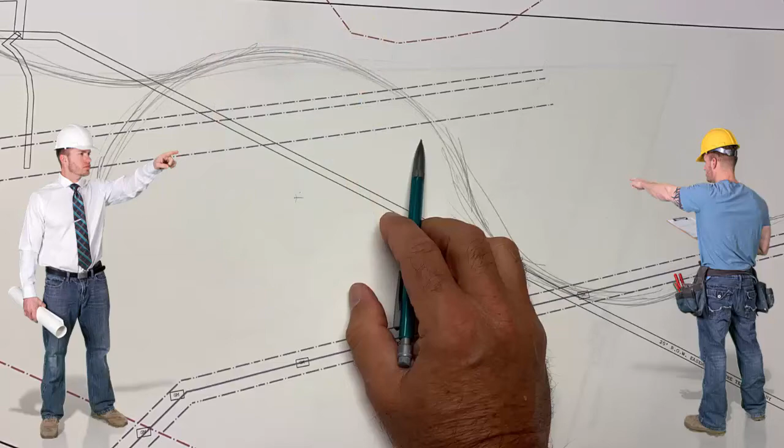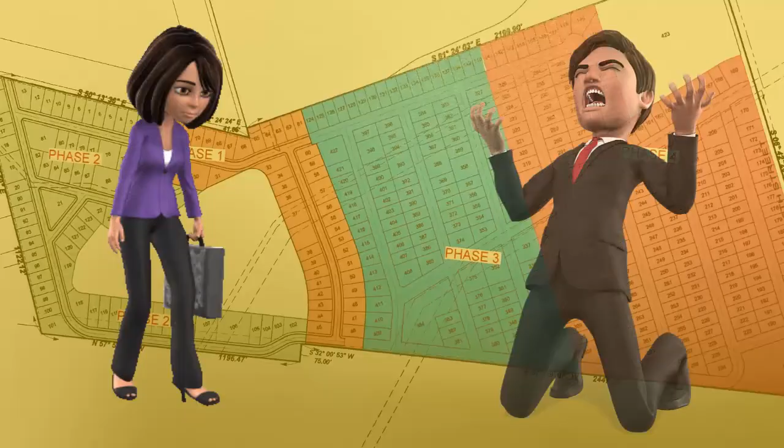Land surveyors and civil engineers demand precision, or they could end up in court defending their work. The land planner, city planner, or architect designing rough concepts, hand-drawn or in AutoCAD without regard to real-world precision, requires the land surveyor or engineer to fix everything. They often trash the original sketch ideas and replace it with a cookie-cutter design. This creates animosity between the artistic consultants, who often do not understand the high cost of construction,

and the precision consultants, who lack the knowledge required to design an exciting neighborhood with market advantages. The land developer will run their financial estimates on the initial concept. This ends up with completely different financials after the engineers get done with their process to final design, often depleting profitability.

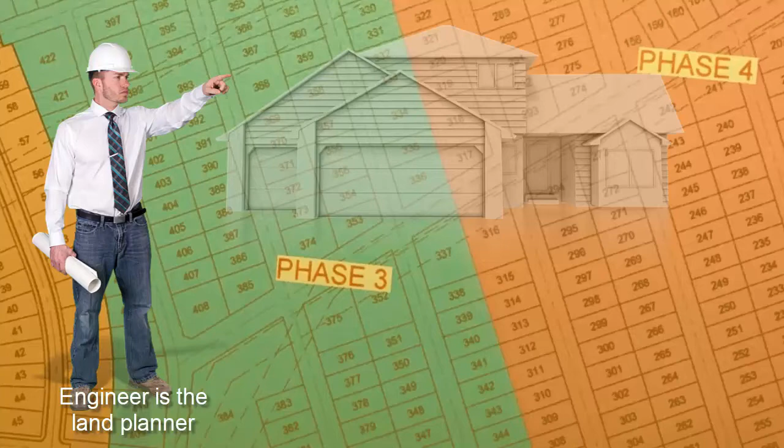The civil engineer acting as a land planner does so with little regard to aesthetics or market advantage for the client, unlikely to pay attention to the architectural elevations or floor plans to showcase the homes or maximize livability. They instead concentrate on the numeric values to make sure the project meets the minimum standards. This situation is typical of the local engineer acting as planner for all their various developer clients. The artistic consultant abhors the results, but most feel powerless. The consumer is the ultimate victim.

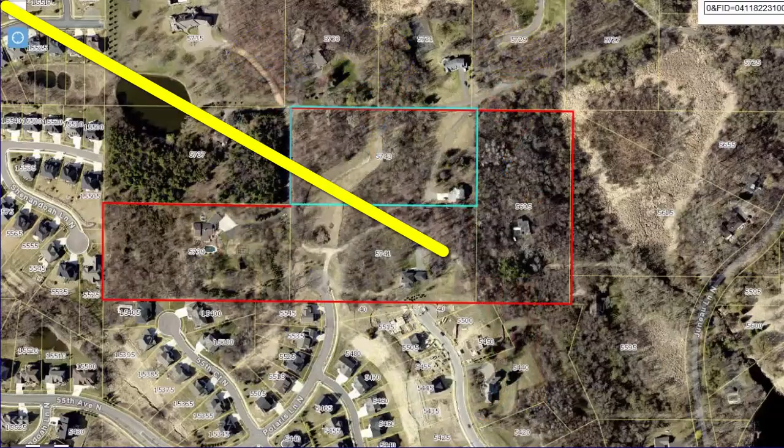Online mapping data is terribly inaccurate. Yet most people, including planners, architects, and engineers, think this free information on the internet must be precision. Well, it's not. In this recent site we planned in Texas, the GIS data from the city, the boundary conflicts

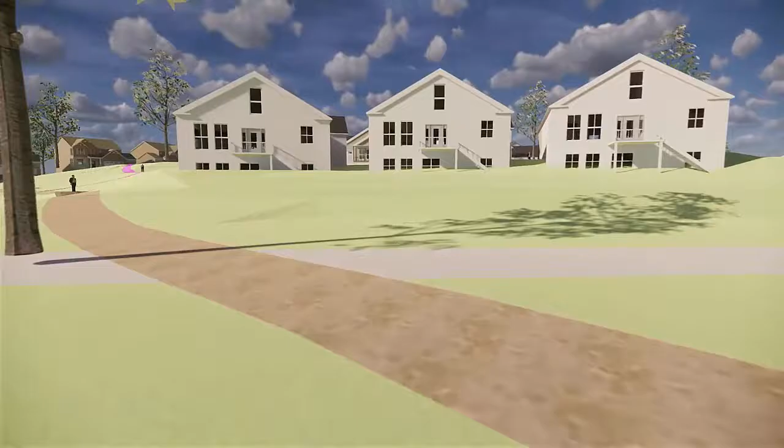with the aerial topography by over 400 feet and over 10 acres. In this recent Minnesota neighborhood we designed, the GIS boundary conflicted with the survey boundary by over 20 feet, requiring a complete redesign of everything. These are not rare instances, but what's rare is when online data is actually somewhat usable.

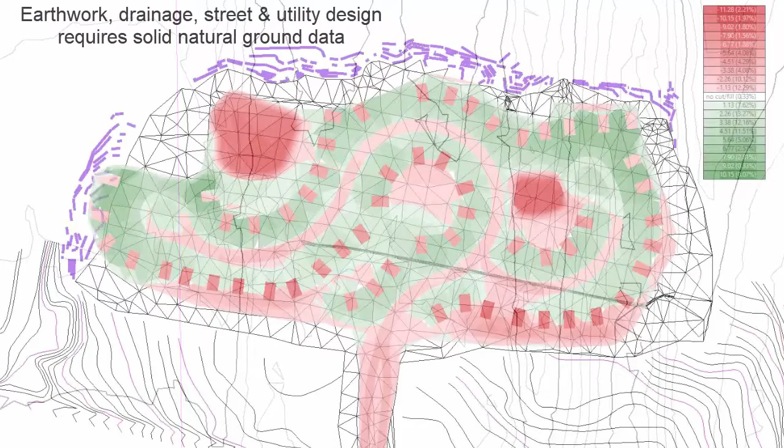The resulting topography is a spastic linework that forms incorrect surfaces, which can create street and utility design and earthwork errors. The survey crew in the field consumes man hours, no doubt, but the excessive data slows down the engineering process, defeating the promise that LiDAR actually saves time and money.

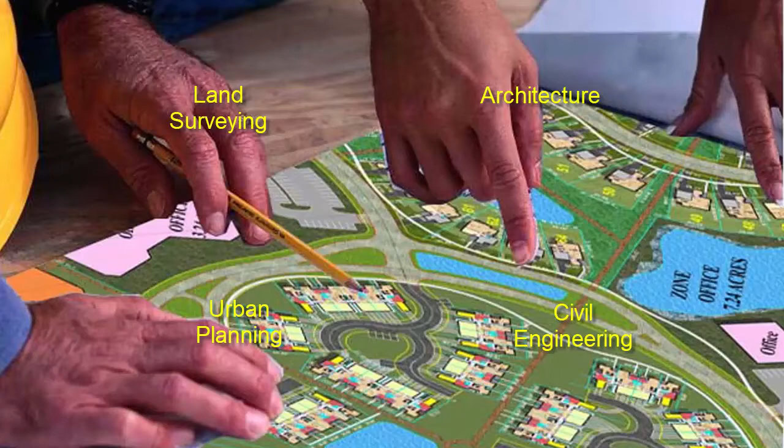Universities that teach architecture, urban planning, civil engineering, and other real estate-related courses should have common exercises, students working on the very same projects, but they don't. The students all learn a very narrow and targeted aspect of growth. They learn totally different software platforms and lack a common knowledge base.

Historically, 80% of the new growth in the United States has been suburban. Post-pandemic, it could be even greater. Most, if not all, urban planning courses do not teach any suburban design courses.

The regulations we have in place fail miserably because they are a paint-by-numbers approach to growth, a zoning classification with a list of minimums. City regulations should reward builders and developers who submit neighborhoods that exceed the minimums. Unfortunately, today's regulatory systems fail to do that.

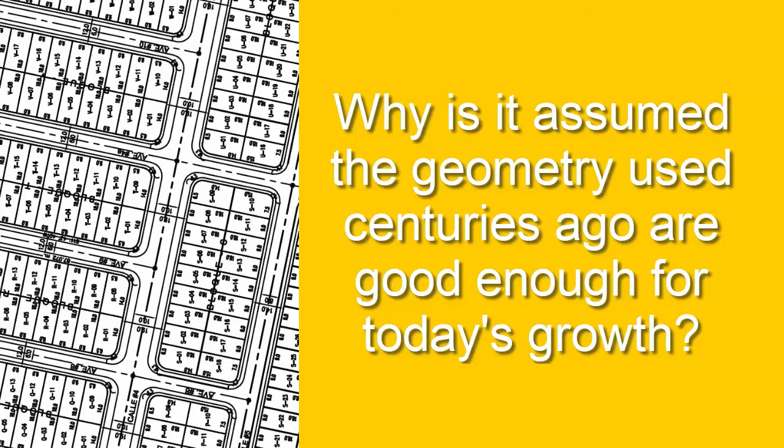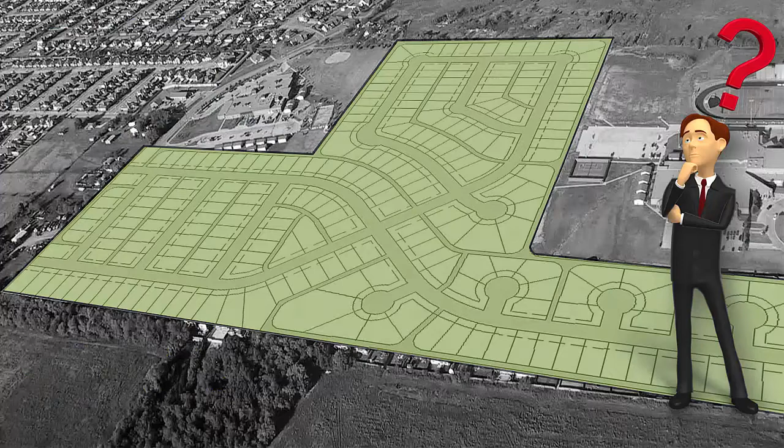The geometric pattern of growth has not changed since the days a wooden cart and donkey served as the family's transportation. The problem is made worse by developers who want to spend the least time and money to get a plan to submit, and far worse when software technology can produce that plan with hundreds of lots in just a minute or two.

Software developers have dumbed down design so that design no longer exists. Look at all the new apartment buildings sprouting in Minneapolis. All appear as if the exact same designer was used. In a way, yes, they all use the same Revit by Autodesk, using the same preset button to produce the same plan in a fraction of the time, yet bill the client the same fees for less.

This problem of over-automation, dumbing down design, has been prevalent in subdivision design for over three decades. Combined with clients demanding work be done yesterday, no wonder developers and builders with good intentions just replicate, and their desire for market advantage and high profits go down the drain.

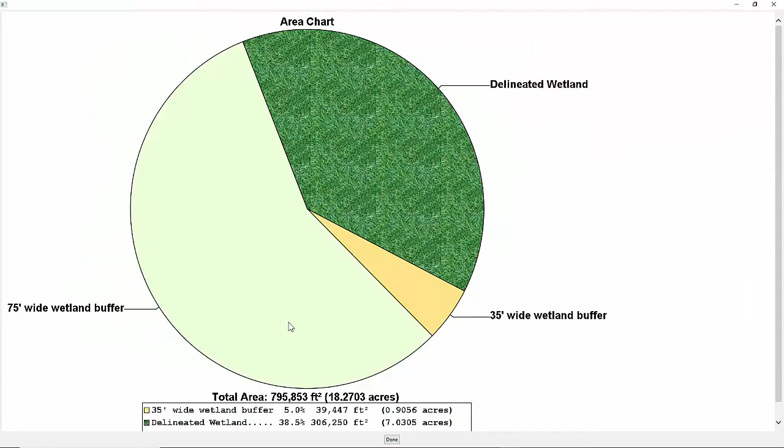Maybe there's too much emphasis on the environment. We need to preserve wetlands, but when a half-acre wetland, a dry wetland, requires a 75-foot buffer, that half-acre becomes 1.5 acres. Take, for example, the city of Minneapolis. Had the wetland laws that exist today been enacted 150 years ago, the urbanized existing population would sprawl 2 to 3 times the land consumed.

Instead of 425,000 people within 58 square miles, it would be more like 425,000 people in 120 to 180 square miles. I think it's time for regulators to start looking at the quality of human family living over that of a duck family in a swamp.

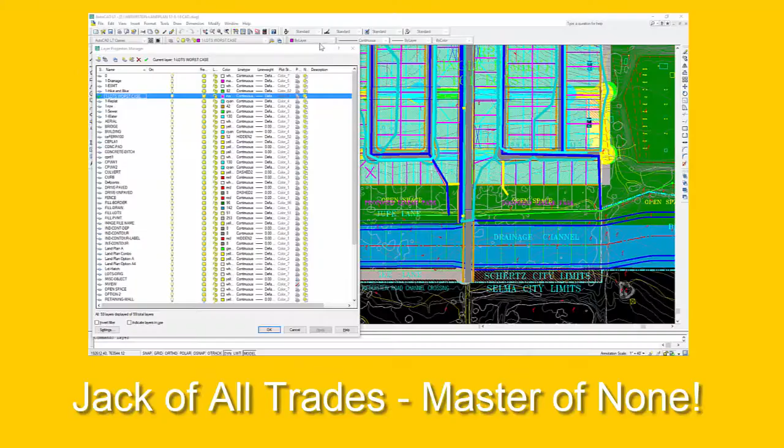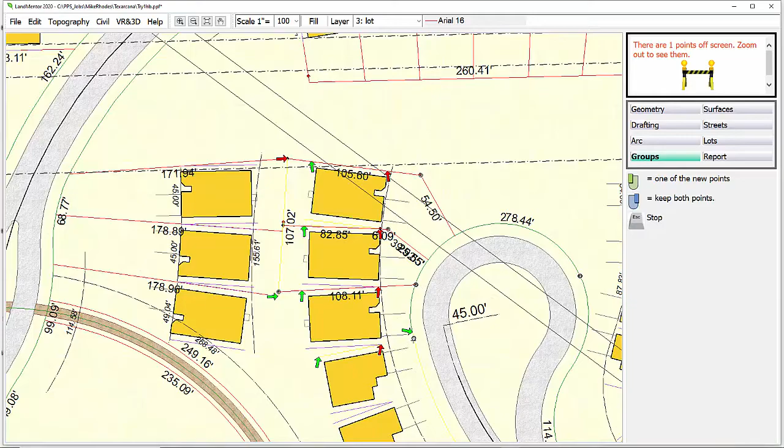Computer-aided design is a jack of all trades and the master of none. It's not spatial, it's intentionally over-complex. Creating a dedicated core technology specific to land development applications that mimics the physical world we live in targets the problems that exist in land development without also trying to serve manufacturing, aircraft, clothing, vehicular, bicycle, and all other forms of design.

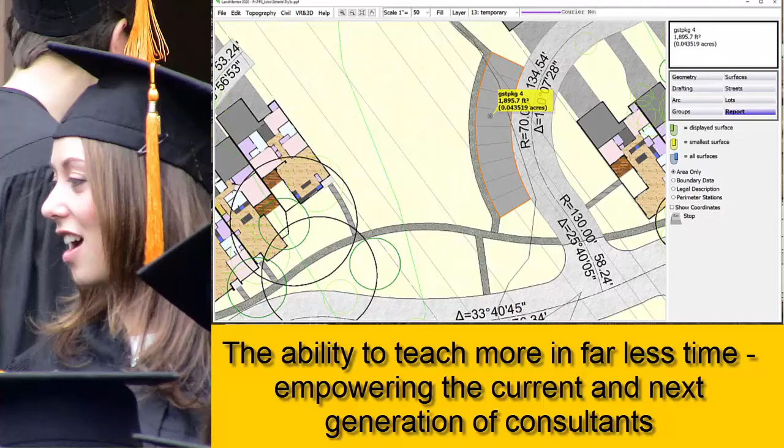Communication in the form of lines and arcs is so 1600s. By replicating the surfaces that define our world, we simplify every aspect of design while providing critical information needed at the conceptual stage. Eliminating the thousands of commands of CAD and creating a more usable, and I dare say fun, user interface, we have created a much better platform to begin with that reduces the learning curve for software from months or years to just a few days.

Instead of taking the time to teach CAD as a tool, we instead take the time to teach high-level design decisions to make a better land development consultant. Land developers today still use a planimeter, a device invented in 1854, to figure out the economics of the CAD design plan. How absurd is that?

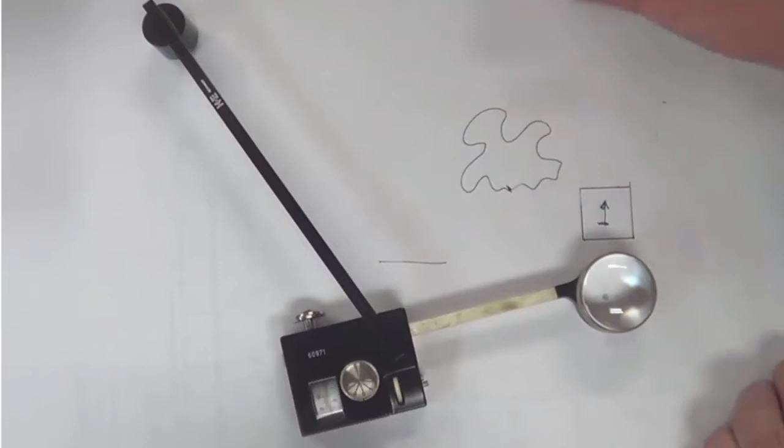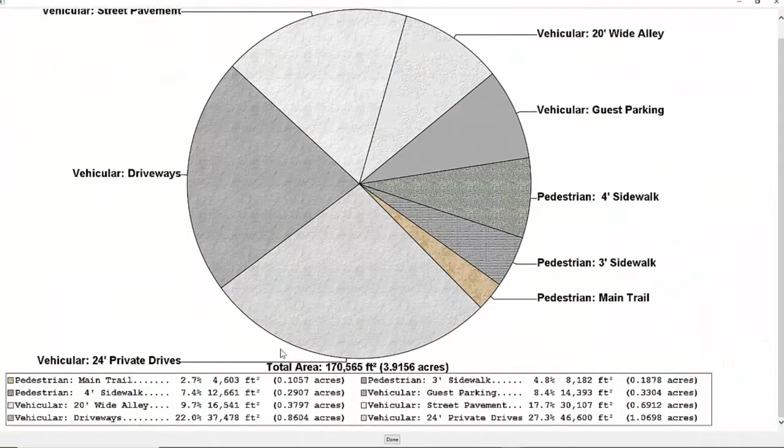The plan itself should contain, with incredible accuracy, the intelligence to communicate exact impacts of what's being proposed at initial concept stage. Modifying existing regulations in a way that rewards better development submittals benefits everyone.

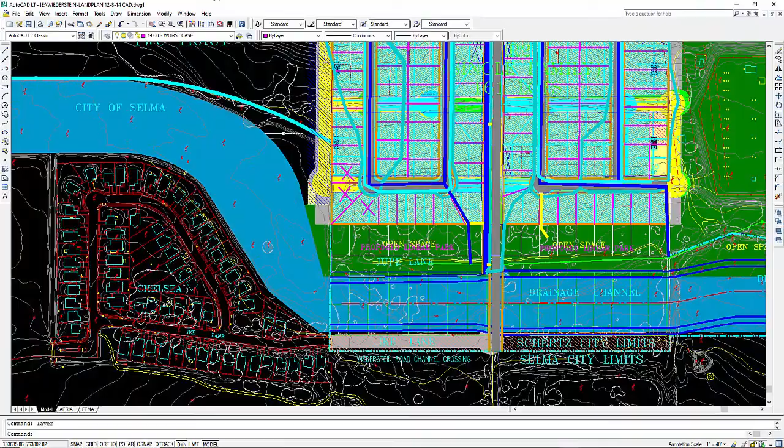Most of the people breathing on this planet know how to play a video game, the perfect and simple technology that has existed for decades. So when will line drawing, that's not much different than a plan of the 1820s, stop being acceptable today? We have the technology to communicate not only in interactive 3D, but immersive virtual reality, quickly, easily, and affordably.

Merging education and all aspects of development within a software technology creates the common knowledge base and communication language missing in the consulting industry. This is key to creating a more collaborative and enabled group of professionals. All of the above is why we developed LandMentor 2020.